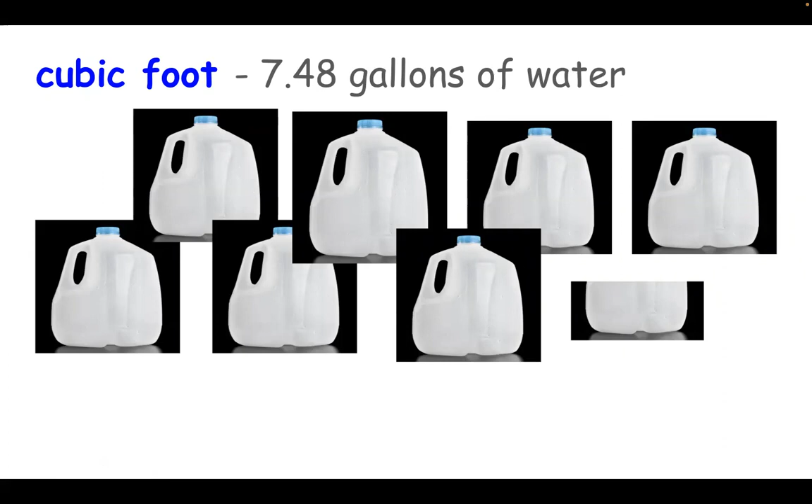Key terms: cubic foot, CF, is 7.48 gallons of water. 100 cubic feet, CCF, is the standard consumption unit, which is often used by districts to bill water usage, as you can see from some of the water details there. Acre foot, 325,851 gallons of water, which is approximately equal to a football field flooded to a depth of 1 foot.

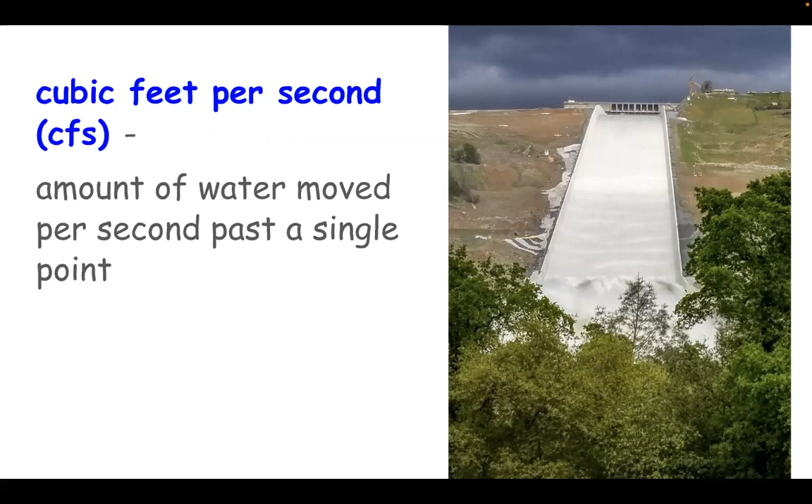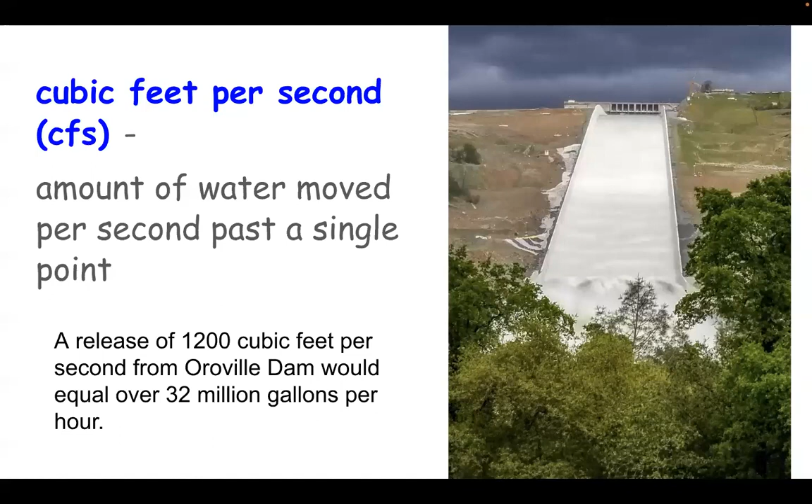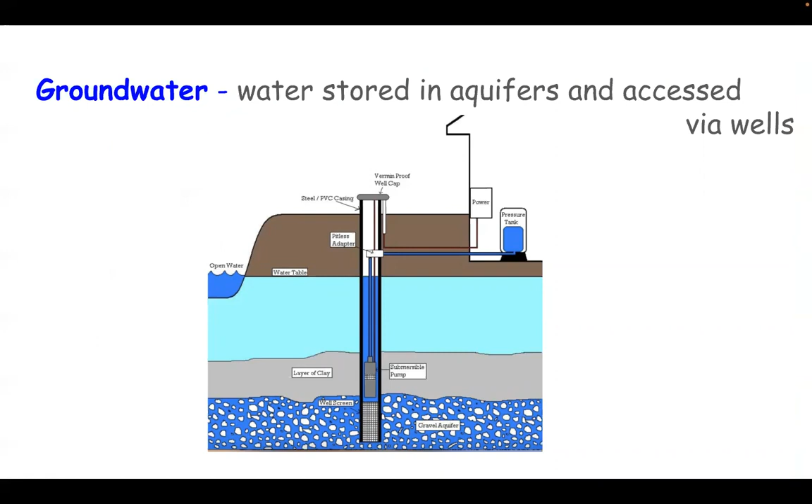Cubic feet per second, CFS, the amount of water moved per second past a single point, such as the release from Oroville Dam. As an example, an Oroville Dam release of 1,200 cubic feet per second would equal 8,976 gallons per second, or 32,313,000 plus gallons per hour. Groundwater is water stored in aquifers and accessed via wells. Surface water, water available from river, stream, creek, lake, or reservoir.

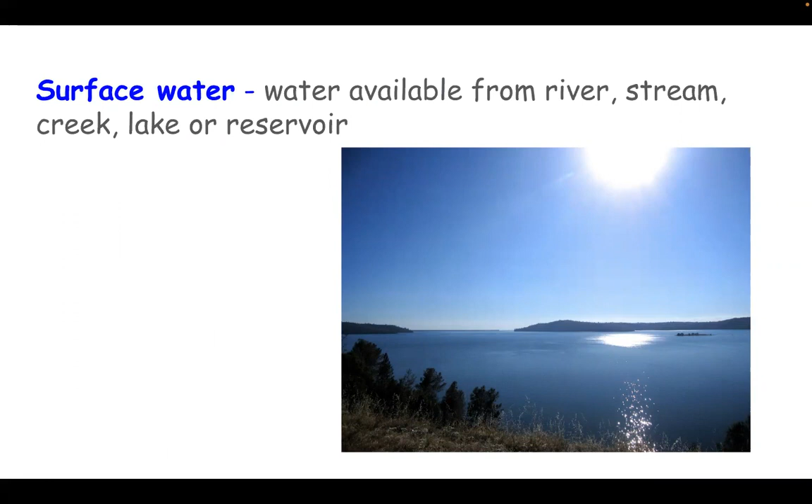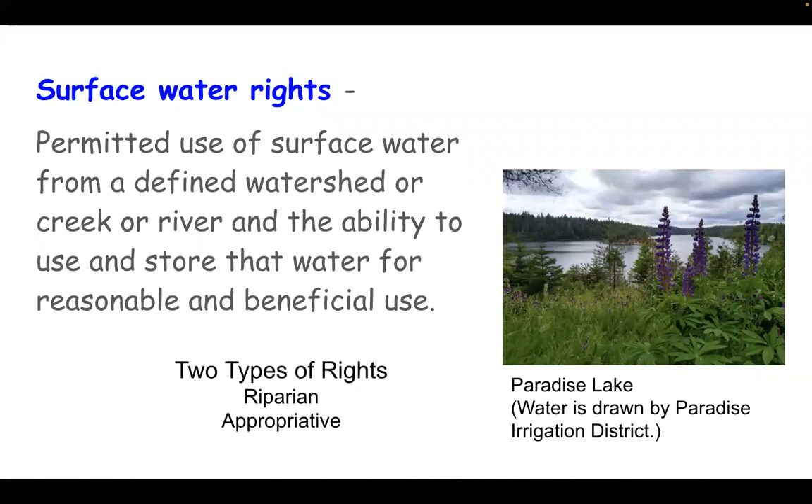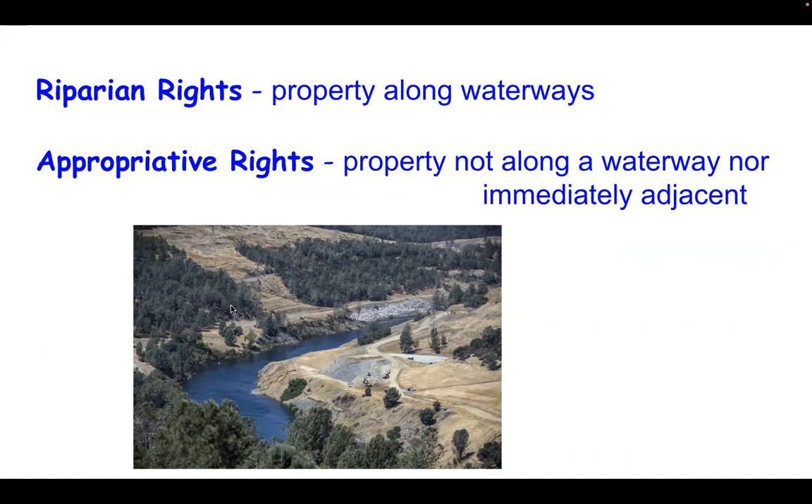Water right, the permitted use of water from a defined watershed or creek or river, the ability to use and store that water. Two types of rights. Riparian is those attached to properties that border natural waterways. And appropriative rights can be secured by properties not immediately adjacent to waterways. These two types of water rights systems created conflicts early on between water users. So the Water Commission Act of 1913 was passed to allow more rational control of water rights. The act declared that water is a property of the state and established a permit process to control water rights.

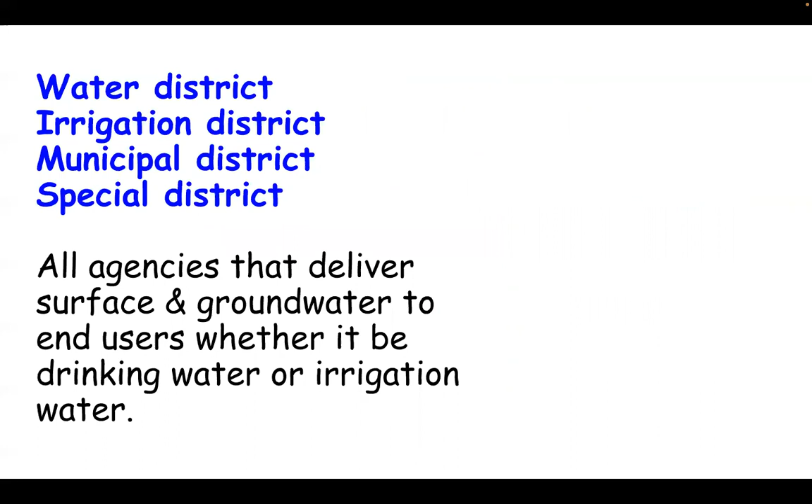The State Water Resources Control Board, SWRCB, was established to govern the permit process. The Water Commission Act became the basis for appropriating water, but it does not apply to groundwater, riparian rights, or appropriative rights established prior to 1914. That is pre-1914 rights. Water district, irrigation district, municipal district, and special district, all agencies that deliver water to end users, whether it be drinking water or irrigation water, and operate under the California Water Code.

Now for our first question, where does your water come from? On your screen now is a map of the Feather River watershed. Many thanks to Kyle Morgado, senior hydro engineer with Yuba Water Agency, who provided this map for us. To orient you on the map, here is Chico, here is Paradise, and Oroville, and of course Lake Oroville, and the North Fork, Middle Fork, and South Fork of the Feather River.

If you live in Paradise, your water is supplied from the Little Butte Creek. Here on the map, you can see the watershed supplying the creek. Some of the water is stored here in Paradise Lake and Magalia Dam. The lower part of Magalia, Paradise Pines, also receives some of this water via an intertie. Water not stored from Little Butte Creek flows down here and eventually joins Butte Creek in Butte Creek Canyon. Butte Creek then continues down through South Chico and into the Durham area. Upper Magalia uses groundwater, and Lower Magalia, Paradise Pines, also has some water supplied by groundwater pumping.

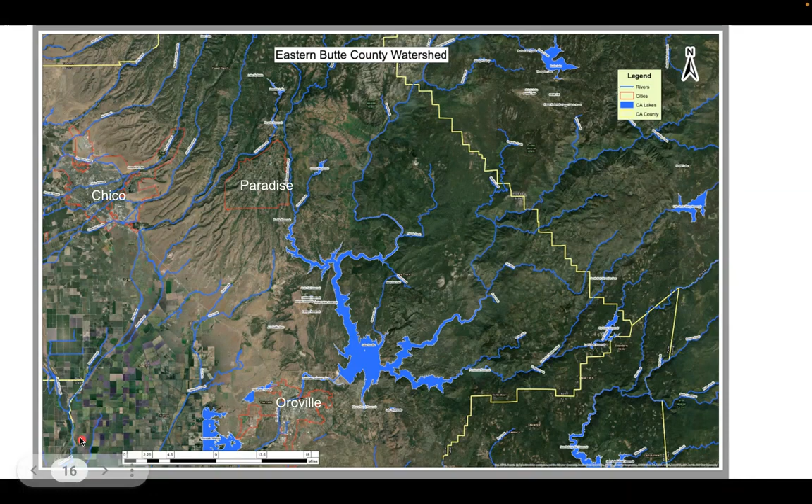If you live in Chico, Durham, or Hamilton City, all of your water comes from groundwater pumping. Agricultural enterprises to the north of Durham and west of Chico also depend on groundwater supplies, since there is no reliable source of surface water available. If you live in Gridley or Biggs, you receive your water also from groundwater wells.

Farming enterprises in the southwest portion of the county, from Durham south to the Butte County line, get surface water from the Feather River, and there are a number of water districts that distribute the water. Biggs West Gridley Water District, Butte Water District, and Richvale Irrigation District are some of them. Many farmers in this area also have ag wells as a backup source during dry periods.

Throughout the county, there are many residents in foothill areas, such as Cohasset, Berry Creek, Butte Valley, or Forest Ranch, that access water through private wells. The same is true for individuals in the valley area that do not live in towns, cities, or municipal areas.

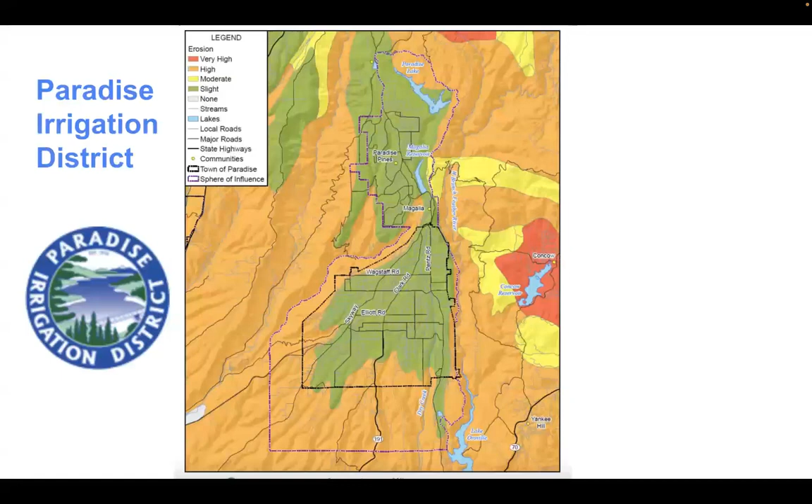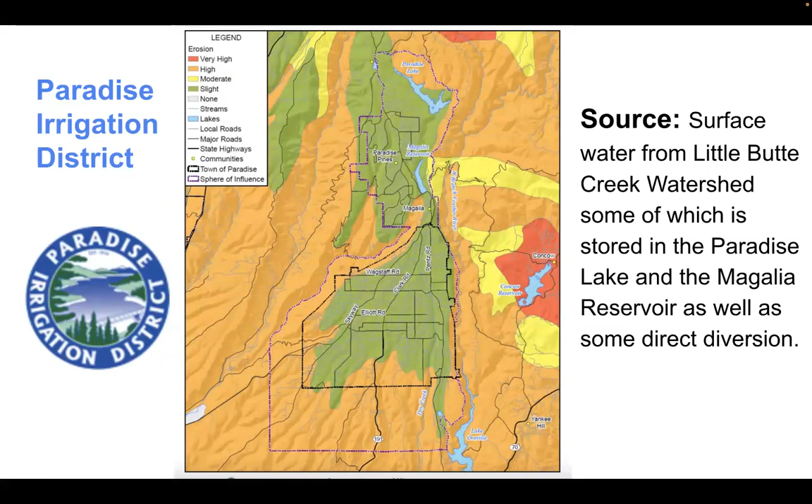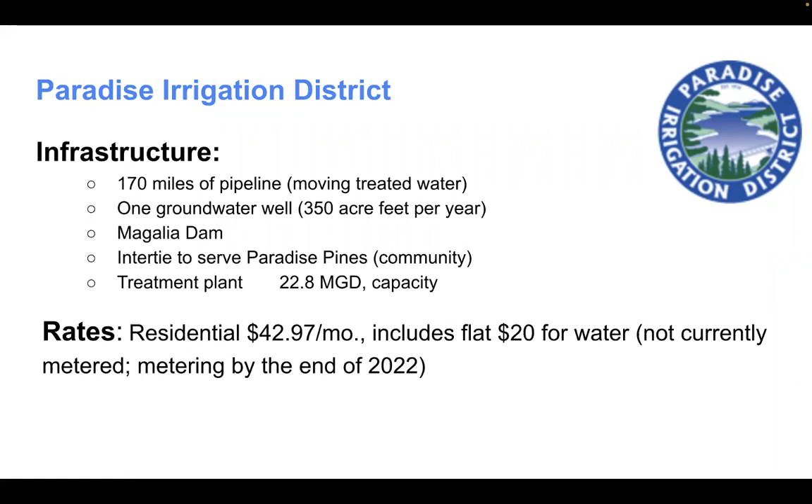The district has been in real financial jeopardy as a result of the Camp Fire, which destroyed much of their infrastructure and took away 80% of their customers. They also can only use a small portion of the potential storage behind Magalia Dam due to earthquake concerns. The state has helped backfill their needs for 2 years, and the district feels that with help for another year and receipt of the PG&E settlement, they will be solvent again.

The district is currently having an options study done by GEI consultants to determine all options for the district while the population returns. Estimates are that it will take about 20 years to return to 80% of the pre-fire population. PID has the rights to more water than the required needs of their customers. They also could store more of the water they have rights to if repairs were made to Magalia Dam. They are looking at possible ways to sell their excess water, including a possible intertie to Chico. This would be complicated and is only in the discussion stages.

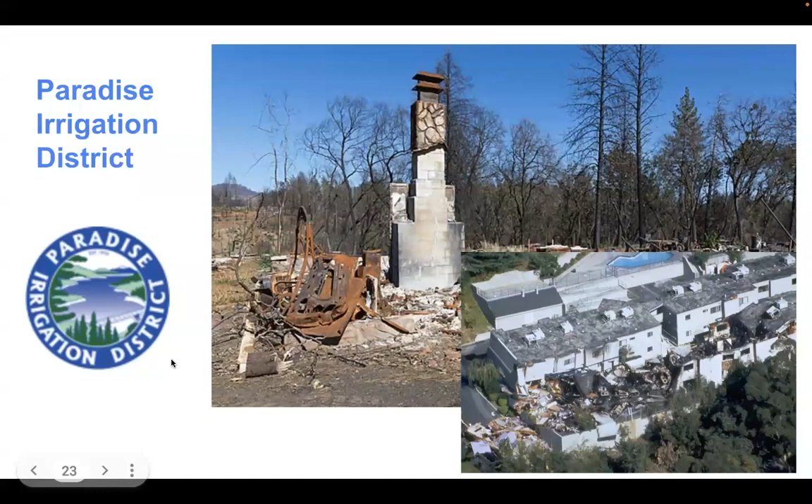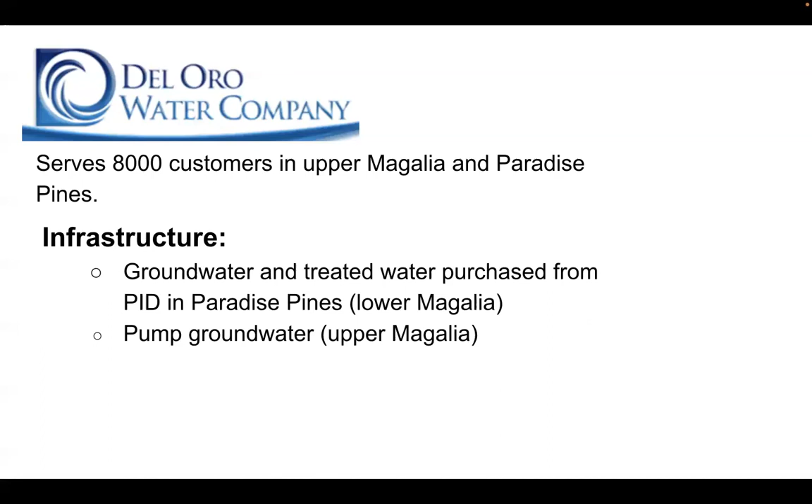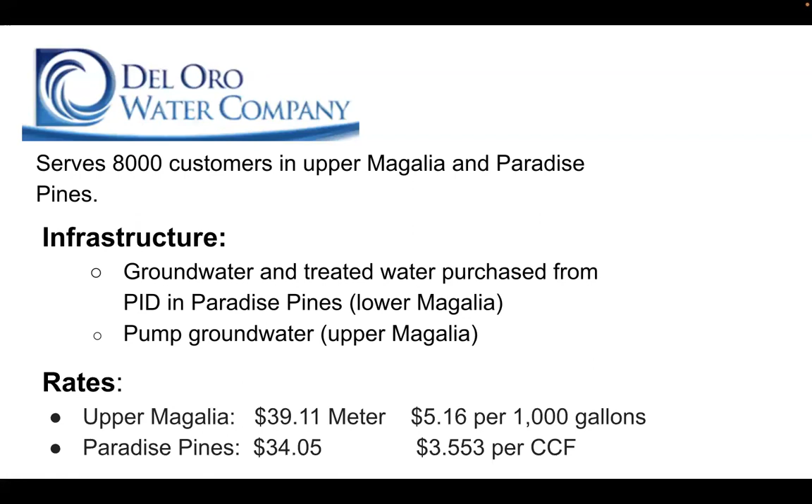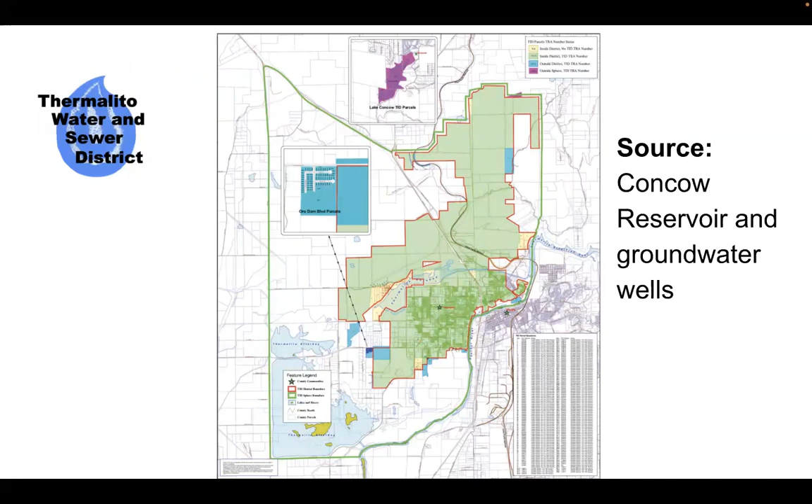The Thermalito Water and Sewer District distributes the water to the Thermalito area. They have a water treatment plant for raw water treatment. You can see the infrastructure they have, as well as costs to customers. They serve a population of approximately 11,000, which is certainly growing as large multi-unit housing projects are being built right now.

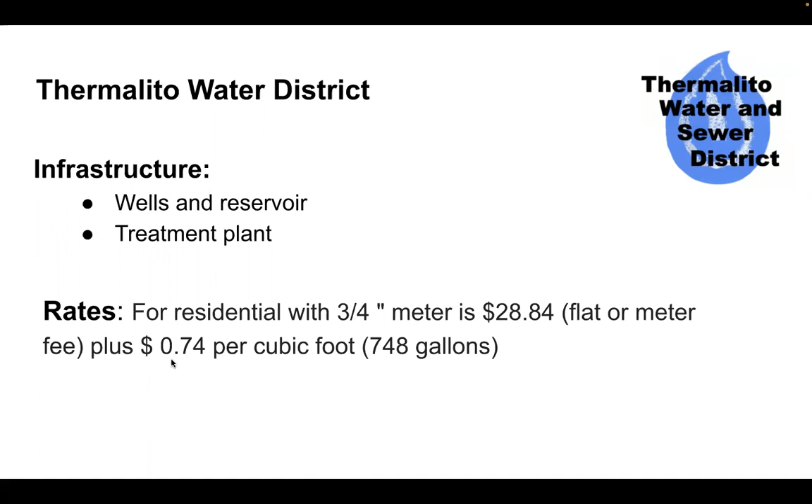The water gets to Thermalito from the Concow Reservoir via Concow Creek into the West Branch and then into Lake Oroville. It is delivered from the lake to Thermalito via the diversion dam and the Thermalito Power Canal.

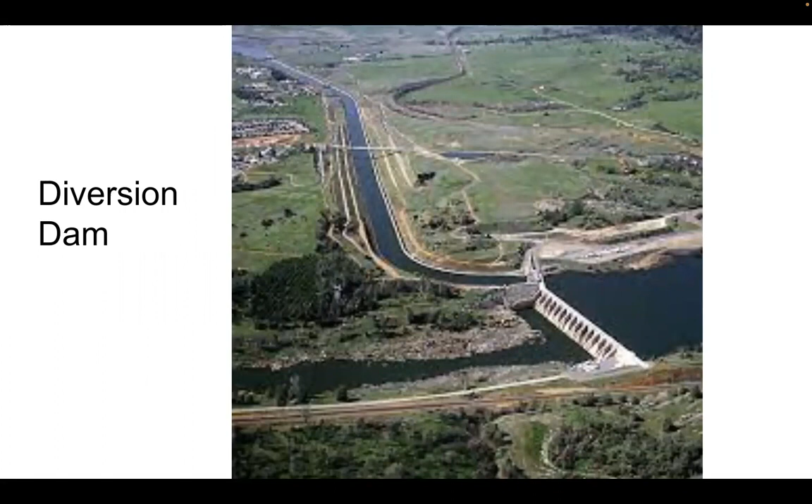Water released from Lake Oroville goes downstream to a diversion dam, which is pictured on your screen. Here, some water is diverted to the Thermalito Power Canal, while the rest continues on to the fish ladder by the fish hatchery in Oroville and on downstream in the main Feather River Channel. The water in the Thermalito Power Canal also supplies water to the Forebay and Afterbay.

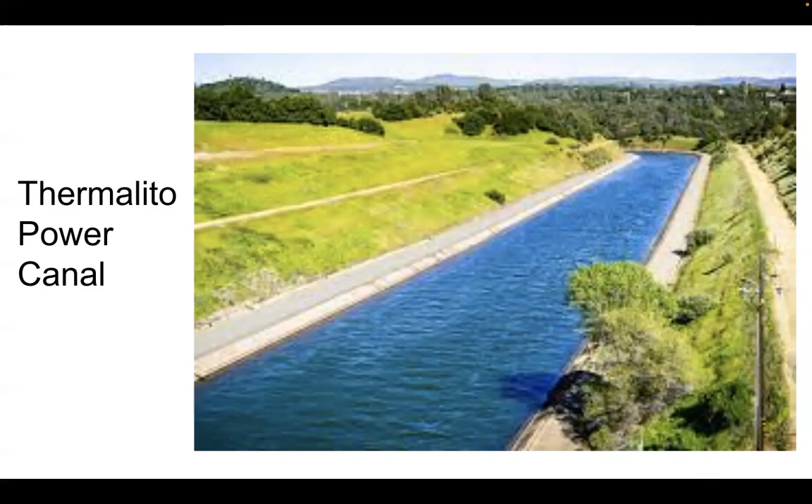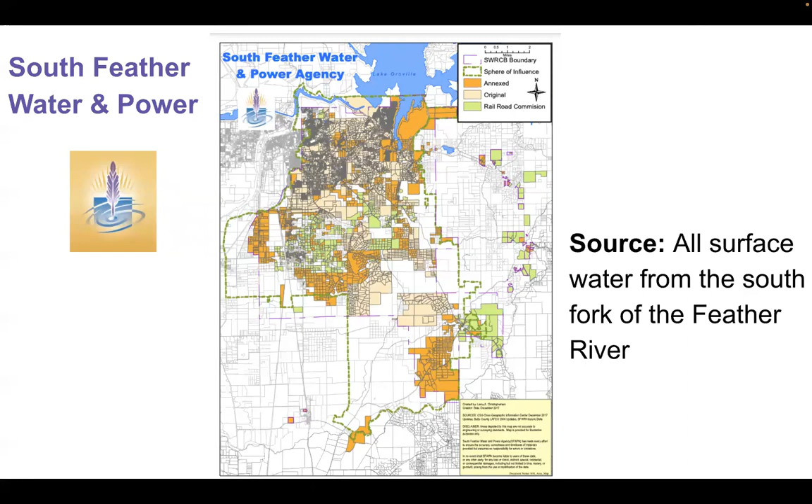South Feather Water and Power, which serves Kelly Ridge, East Oroville, and ag users in the East County area to the southern border of Butte County, is a very large and complex district. The district has rights to all the water on the South Fork of the Feather River. South Feather Water and Power is a power generator with 5 reservoirs upstream from the Oroville area generating electrical power.

Their reservoir at Little Grass Valley is a large recreational facility with campgrounds and boating facilities. They have a water treatment plant near Kelly Ridge and serve approximately 10,000 residential users. They also have 160 miles of open ditch canals, which take water from the South Fork and distribute it throughout the region to agricultural users.

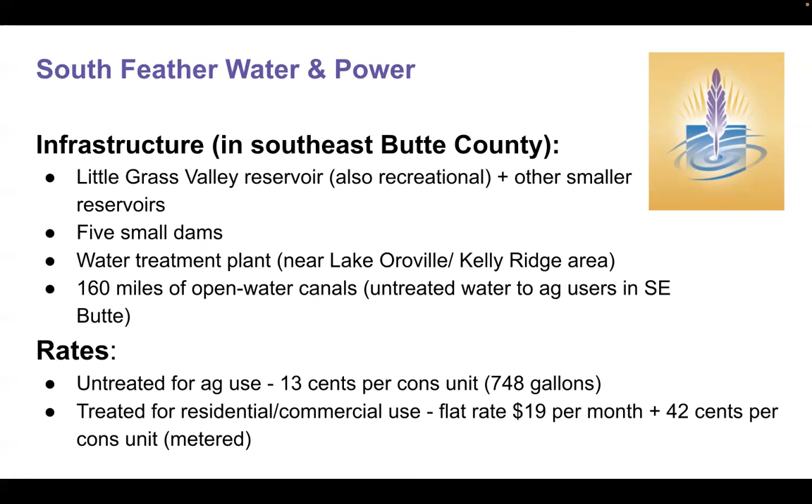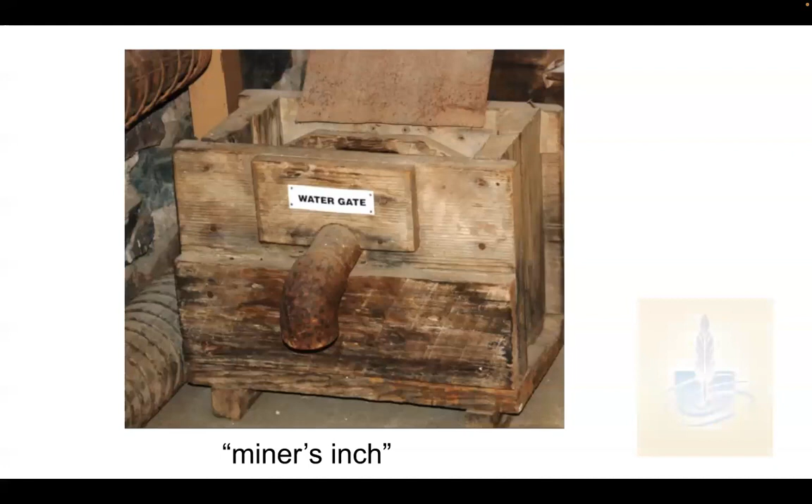My orange orchard is located within the South Feather Water and Power District, and when my husband first bought the property, we were billed in miner's inches. The history of South Feather Water and Power is the most interesting one, and a copy of that history is available on our website, along with many other of the resources that we have used for this presentation.

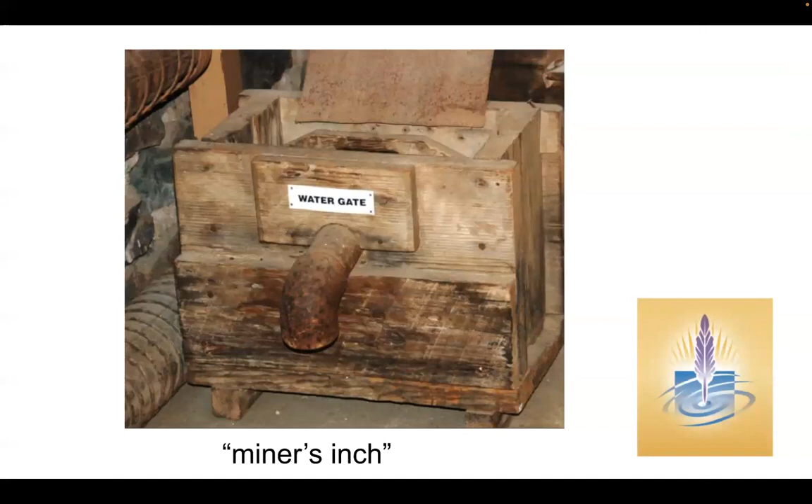South Feather Water and Power has the rights to more water than is currently being used by the district for existing customers. They are well placed to provide both residential and agricultural water as population within their district continues to grow.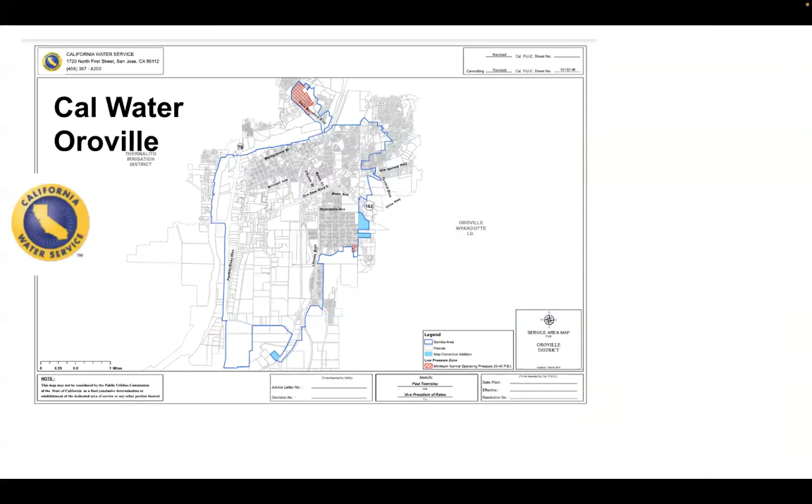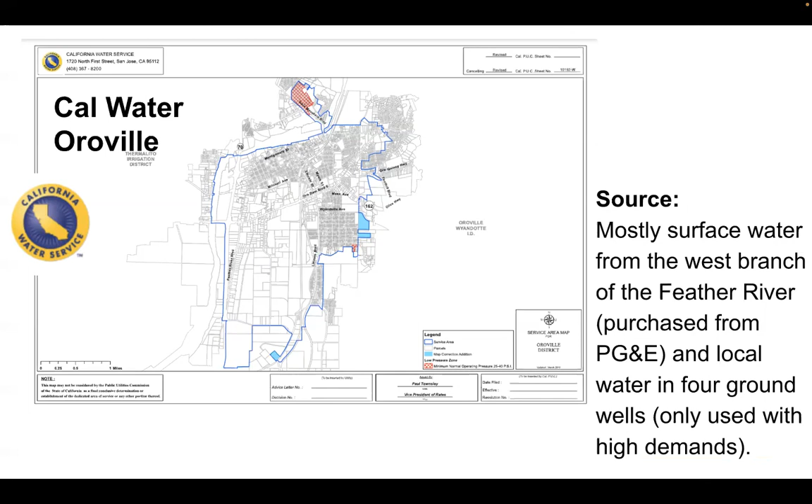Cal Water Company Oroville distributes the water in the main city of Oroville. They do not have water rights to any surface water and purchase their water mainly from PG&E. PG&E sends the water through the west branch of the Feather into Lake Oroville, and it comes to Cal Water Oroville through the Thermalito Power Canal, which you viewed a little while ago.

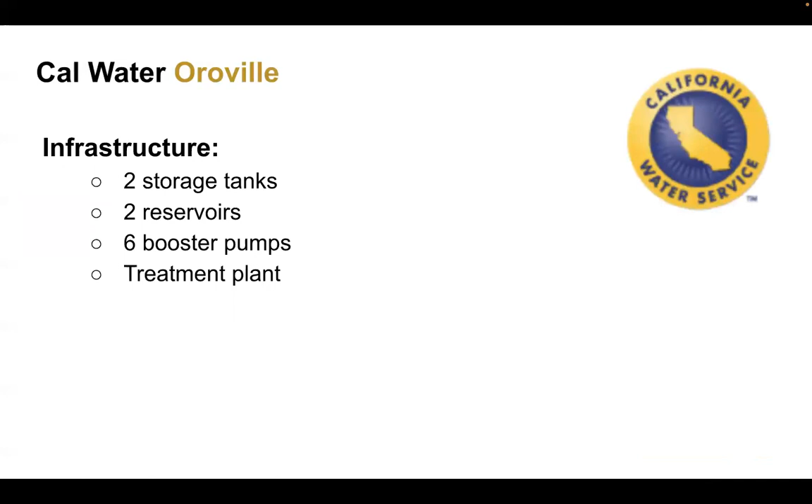They have 2 reservoirs and 2 storage tanks. They also have a water treatment plant. And once again, you can see their residential rates.

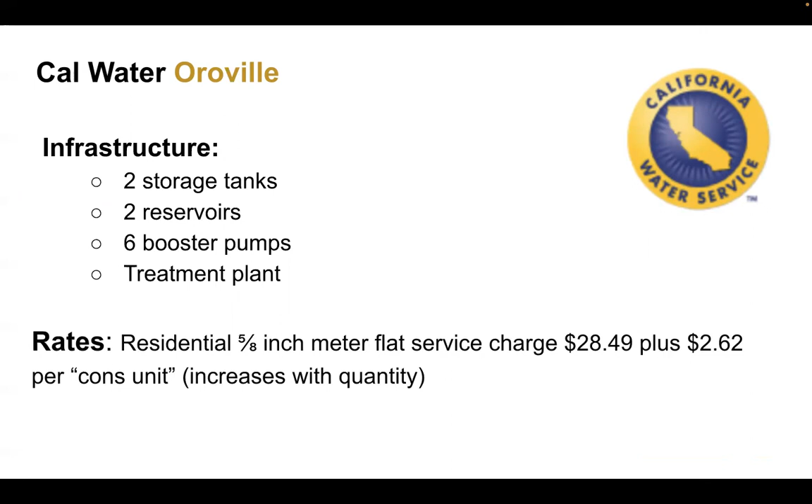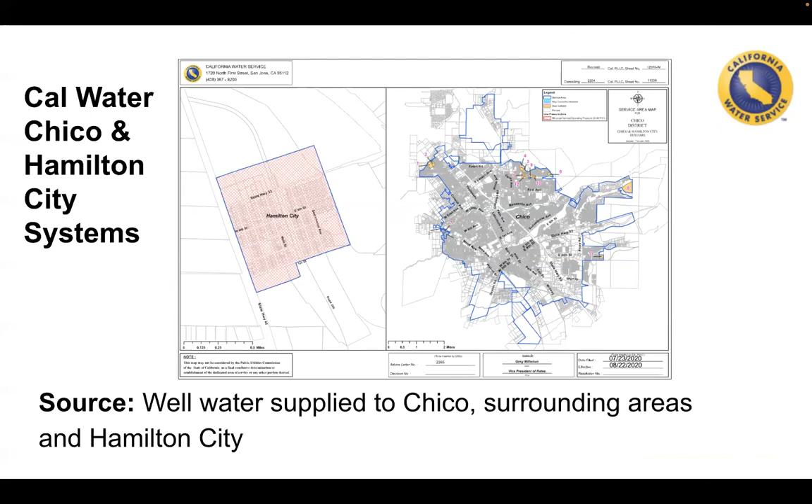California Water Service in Chico pumps all the water it delivers from groundwater sources. It also serves Hamilton City. Chico District has 68 wells, which pump an average of 27 million gallons of groundwater a day. Hamilton City has 3 wells and pumps about 1/2 million gallons per day. Cal Water Chico currently has no facilities to receive raw water.

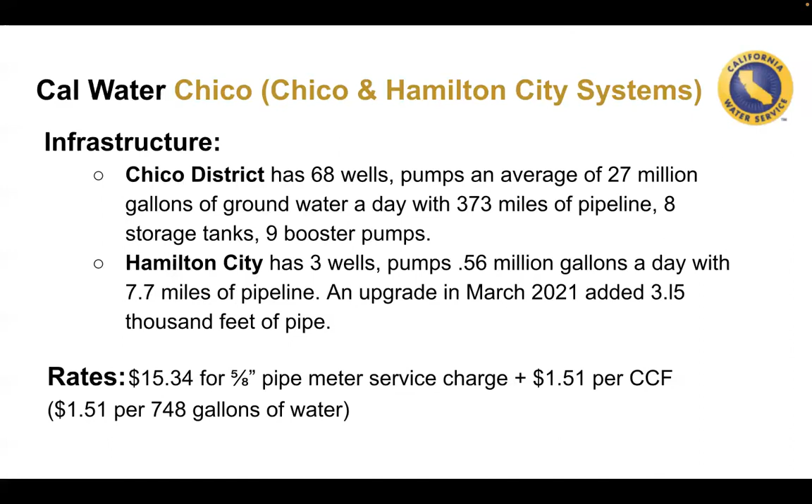Those residents living outside city limits or in areas where there is no water service company rely on groundwater from private wells. The groundwater supplied to Gridley and Biggs is managed by the public works departments in those communities.

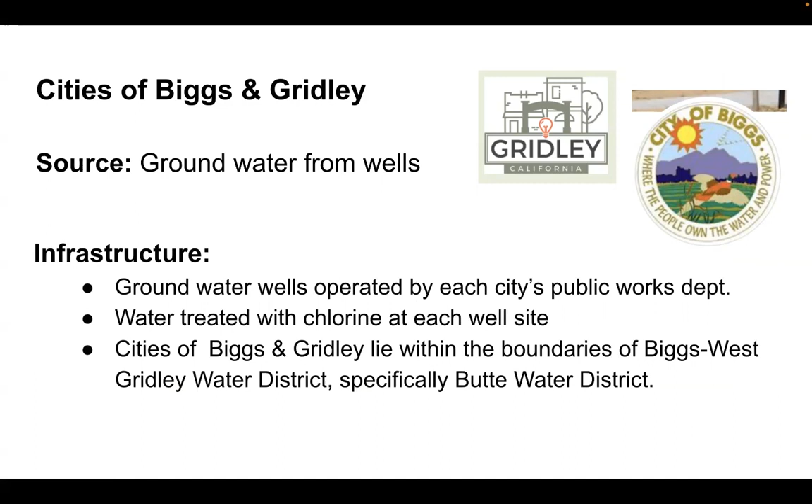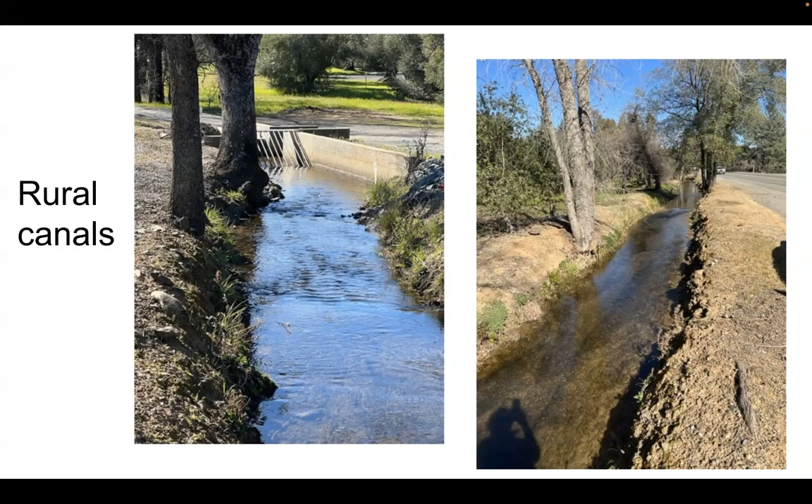As I said earlier, this is also a warming basin for water before it is delivered to agricultural users. The Thermalito Afterbay Dam, at 42,000 feet long, is the longest crest in the California State Water Project.

As in other parts of the county, there are many small acreages and individual homes in the rural areas which rely on private wells pumping groundwater. Many of the ag users also have backup wells for use in time of water shortages.

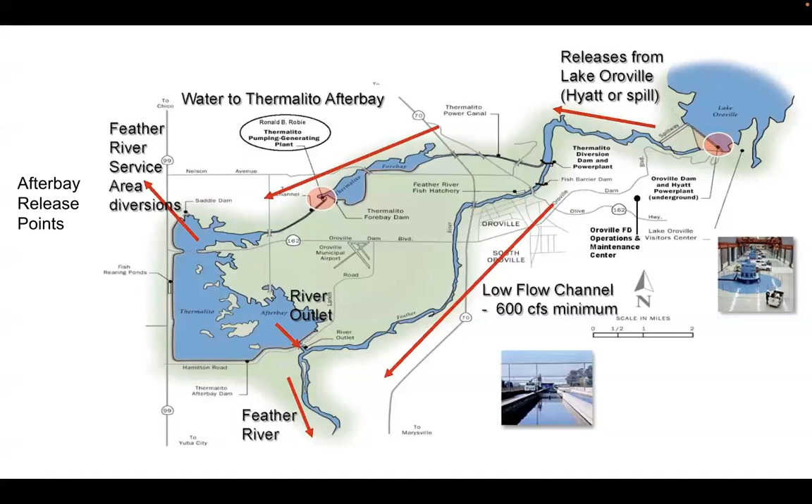Where does your water come from? How is it distributed? And we have shown you the many sources of water in our county and the many complex systems by which it is distributed to our urban communities, as well as agricultural enterprises in the county. Now, question number 3 is, why does it matter? We know that water is a source of life.

All of the eastern portions of our county and the farming region in the southwestern area are almost totally using surface water. Surface water rights have long been regulated in California, and the rights of some of them, like the Paradise Irrigation District, South Feather Water and Power, PG&E, and many other agricultural irrigation and canal districts in the Southwest County for water from the Feather River are of long standing. There is available water to meet the needs of these portions of our county and to allow for growth in the Oroville and Paradise urban areas.

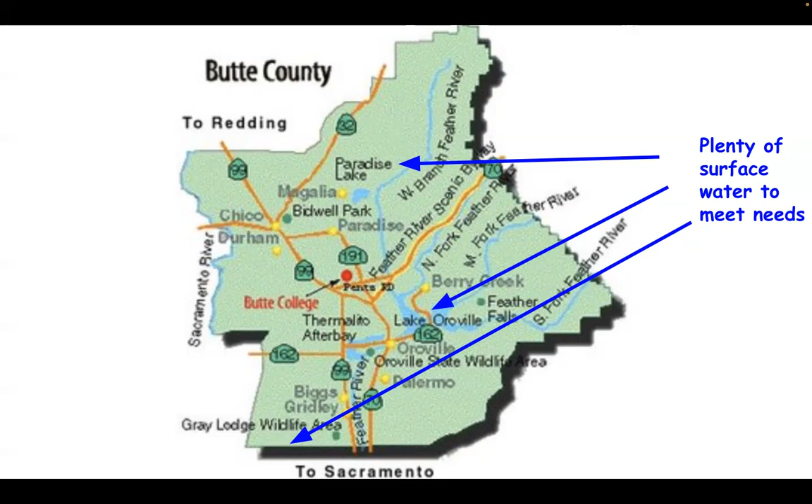However, to the west, Chico, Hamilton City, Durham, Gridley, and Biggs, as well as the agricultural region north of Durham and west of the county line, are all dependent on groundwater resources. There are real concerns by urban residents, as well as farmers, that restrictions on groundwater pumping will adversely affect the ability of that area to add population or to farm the land, or worse yet, that the restrictions will not be strict enough to support the aquifer at a high enough level to keep urban trees and natural habitat prospering.

There are some advocates who support finding a source of surface water that could be moved to the Chico area to help reduce the amount of groundwater usage. The Tuscan Water District has just been approved by LAFCO. The stated aim of that soon-to-be formed district is to bring additional water into the Chico area, or even to interject surface water into the aquifer. The Paradise Intertie is one example of this. Is this possible? Is there available water in other parts of the county to move additional water from? What are the potential benefits and liabilities?

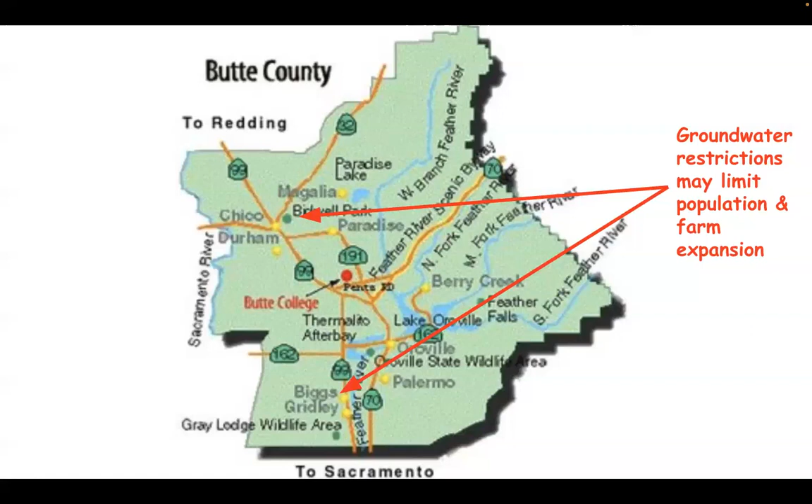As you have seen from our presentation, moving water from one point to another is complex and expensive. If that water must be purchased, it is much more expensive. There are certainly many challenges ahead and many questions that must be answered if additional water is to be brought to the Chico area.